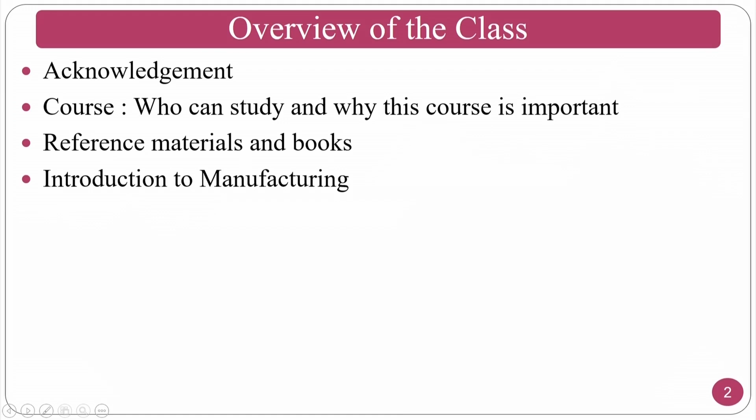Introduction to manufacturing, because abrasive machining and finishing process comes under the category of manufacturing. So just a glimpse of why manufacturing is important, and other things I will explain.

Overview of the syllabus in a normal way, what is the overview, content and all those things, and I am also going to talk about the same things in an elaborative way.

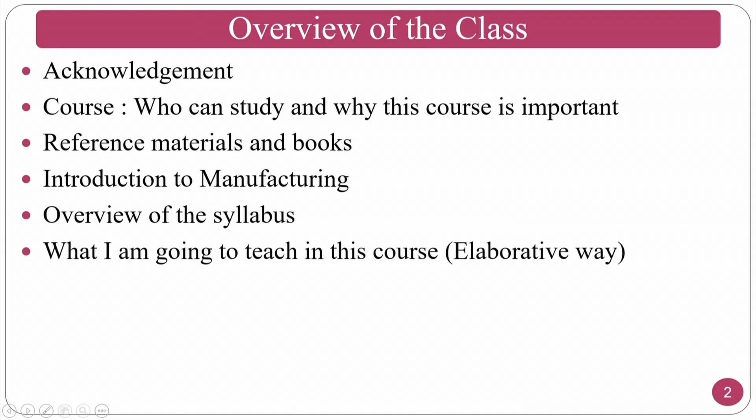So, introduction to abrasive particles. Before you study about this particular course, what is an abrasive particle, how can you measure the size, what are the varieties, what about the cutting edges, what are the rake angles and all those things. The manufacturing of abrasive particles, how these abrasive particles are fabricated, and the size and shape of abrasive particle, how do you determine the size of the abrasive particle. I conclude this particular class with a summary of what I am going to talk about in this particular class.

Coming to the course, an overview of my course on Introduction to Abrasive Machining and Finishing Process. Who can study this course?

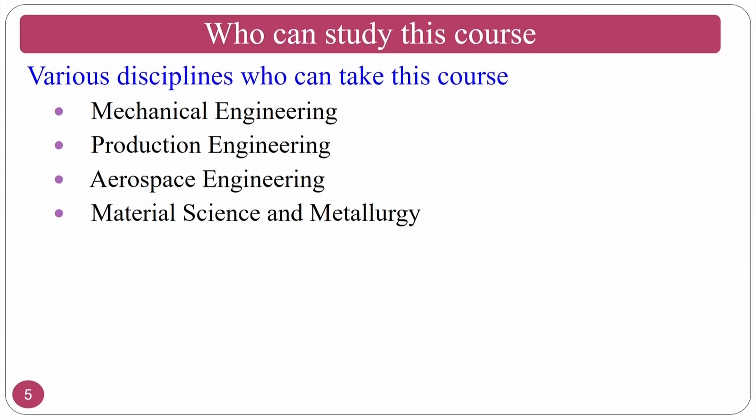Normally this is particularly very helpful for mechanical engineers, production engineering people, aerospace, material science and metallurgy people, and moreover it can also be helpful for other departments who want to learn about manufacturing and other things.

In the intended audience, it can be useful for BTech students where you can learn the basics, MTech and PhD students who can learn the basics as well as take up some of the course contents as research topics, and faculty who teach manufacturing, particularly about machining processes. As you know, this particular course comes under subtractive manufacturing.

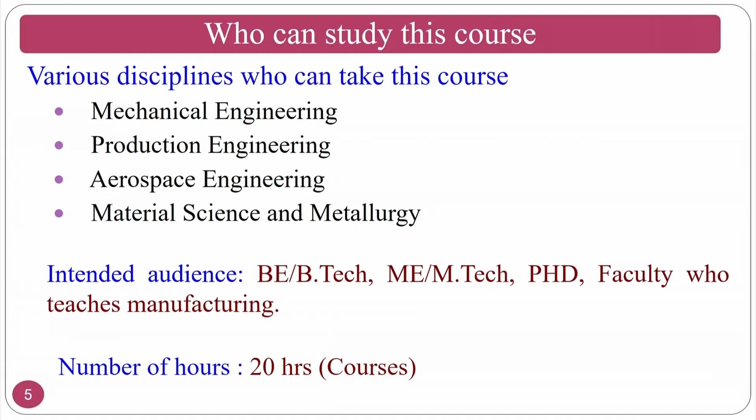Number of hours is 20 hours course. So I am going to take this particular course in 20 hours.

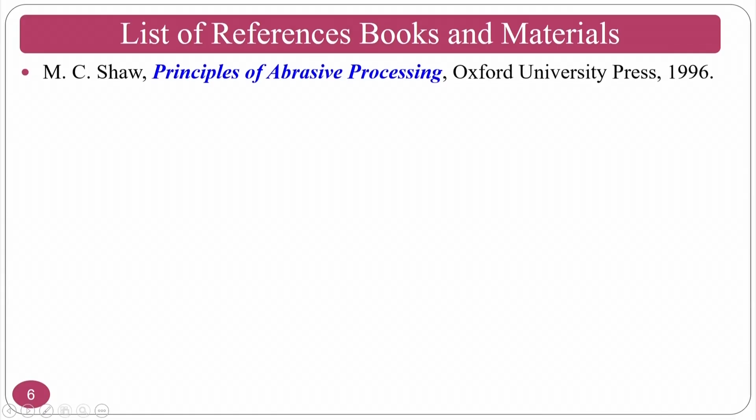List of the reference books. The first and foremost book that you can refer is Principles of Abrasive Processing by M.C. Shaw. Professor V.K. Jain's Micromanufacturing Processes, because advanced abrasive finishing processes you can take from this particular book.

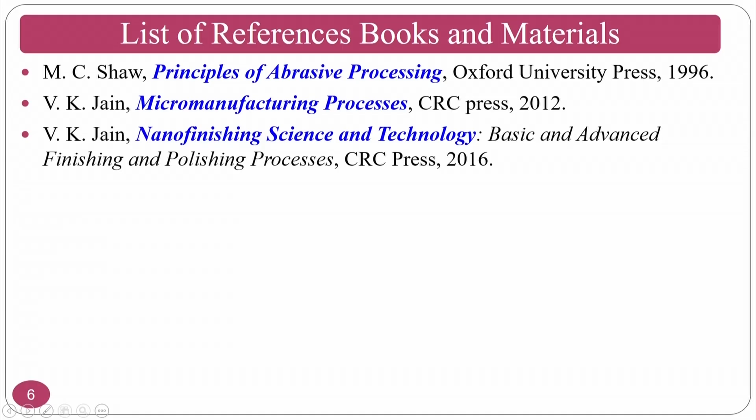And elaboratively, if you want to understand the mechanics, the in-depth knowledge and all those things, you can go for Nano Finishing Science and Technology, where you can study analytically. As this course is an introductory course, you will only understand how this process works, and I will give you a glimpse of the overview. I am not touching the mechanics and other things, so I am not going to teach you any mathematics or something. I will touch some of the mathematics, not in deep mathematics.

In case you want to understand more, you can see this particular book, Nano Finishing Science and Technology by Professor V.K. Jain, and Joseph McGeough's book, where you can study about advanced methods in machining. Professor G.K.

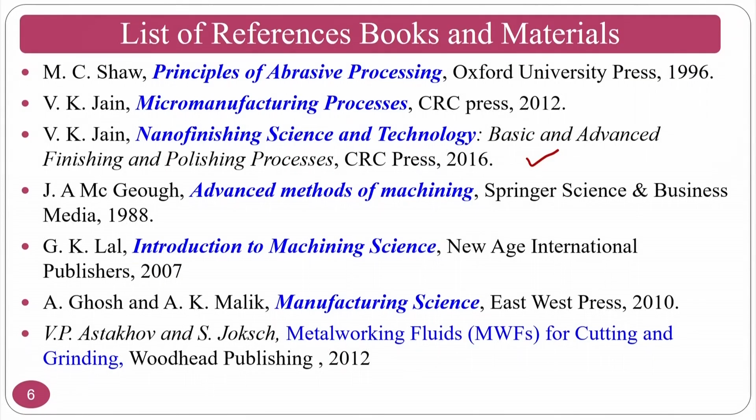I am following the Lal book for grinding operations, conventional machining and finishing operations, and Professor Ghosh and Professor Malik's book on manufacturing science, which gives an overview of abrasive machining and finishing processes, along with Astakhov's work. I also teach about grinding fluids and ecological aspects of grinding fluids, also called cutting fluids, but the same principles hold for single point and multi point cutting tools. Cutting fluids are the same, so we can use these cutting fluids as metalworking fluids in this course.

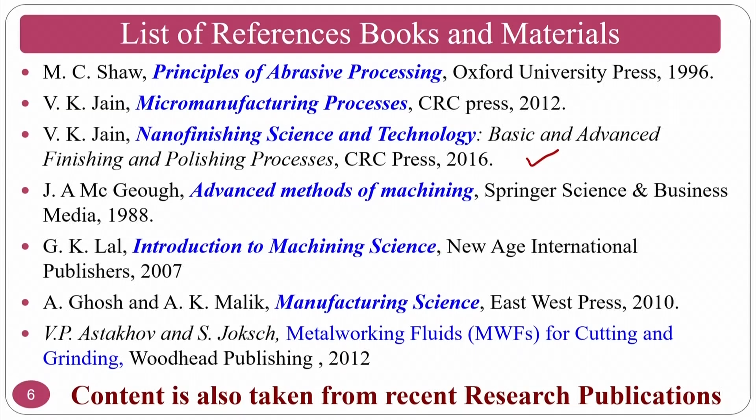The course content is not only from these textbooks; I have also taken some latest research papers and compiled them in this material. So the content is not just from the books, you can also refer to the latest papers in this particular area.

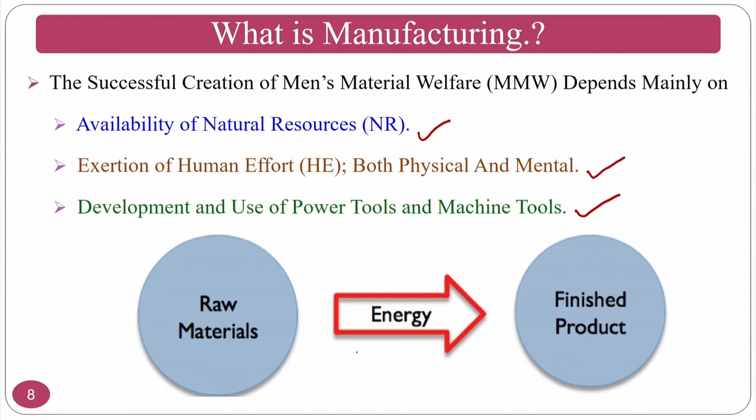Coming to the introduction of this course, which is part of manufacturing, let me talk a little about manufacturing. What is manufacturing? Successful creation of men's material welfare depends mainly on the availability of natural resources, exertion of human efforts both physically and mentally, and the development and use of power tools and machine tools. In a broad view, manufacturing is nothing but conversion of raw materials using certain energy into a finished product. Assume I have bauxite material and want to make an aluminum sheet for a car - I have to use certain external energy to prepare the final product. This process of converting raw materials into a final product is manufacturing.

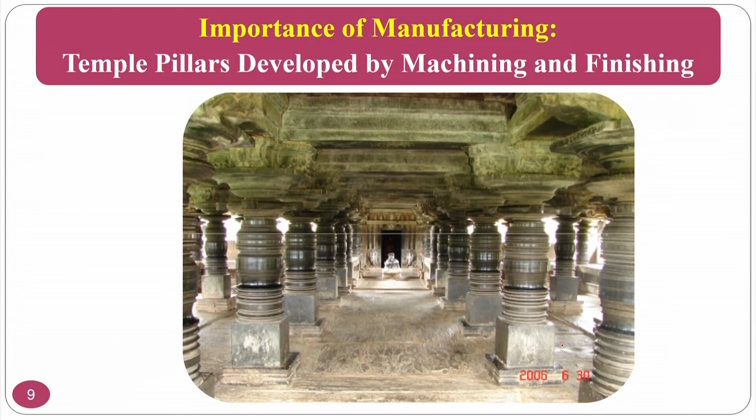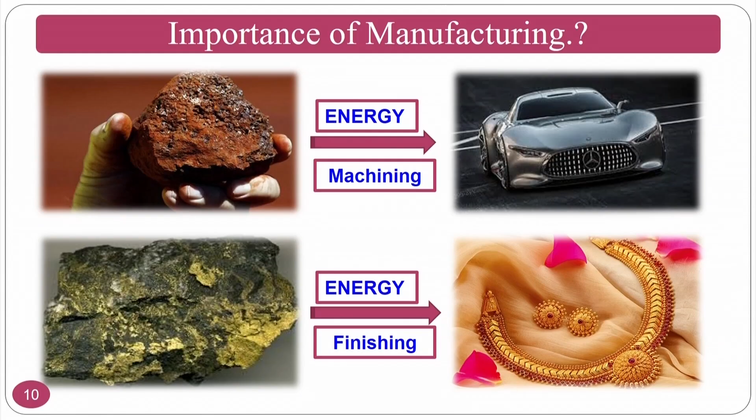This is the importance of manufacturing - if a country's manufacturing is most developed, that country can become one of the superpowers. For example, China's manufacturing is so good, and as Indians we should aim to be equally good compared to China so that we can also become a superpower. So I request everyone to understand that manufacturing is one of the good courses which can make India a great country. Most manufacturing industries are located in India, so gain the knowledge and work for those manufacturing companies to make India great.

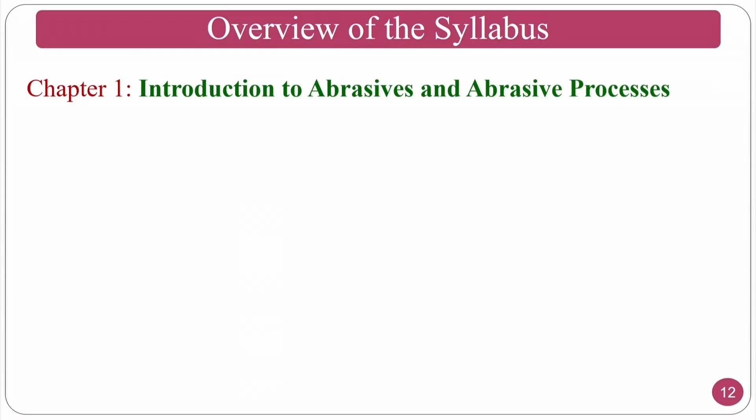Coming to the syllabus of this course on Introduction to Abrasive Machining and Finishing Processes - an overview of the syllabus. Chapter 1 deals with Introduction to Abrasive Particles, classification of abrasive processes, and other topics.

I am dividing this particular chapter into 3 classes - sometimes it may go beyond 3 classes or end in just 2. For this plan, I am having 3 divisions. The first division is Chapter 1A: Introduction to Abrasive Particles and Classification of Abrasive Processes. The second is the grinding process and its classifications, applications, grinding fluids, and other things. The third covers the grinding process, tribological aspects, grinding fluids, and sustainable grinding.

Then we come to conventional abrasive finishing processes like honing, wire brushing, lapping, buffing, super finishing, and other things. We also study surface integrity, which refers to surface metallurgy plus surface morphology, along with many other practical conventional finishing processes in this Chapter 2.

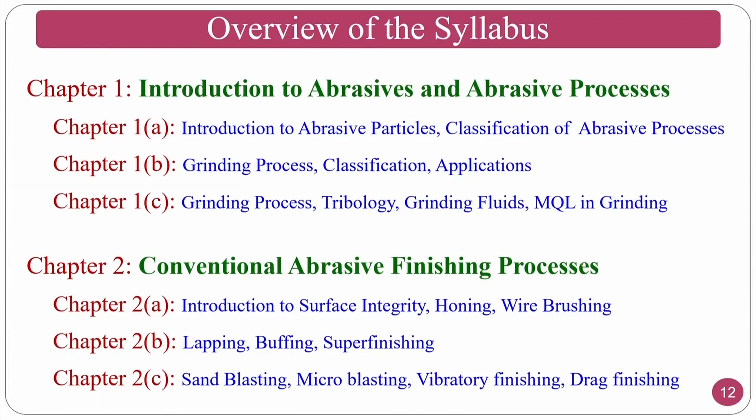In Chapter 3, we study advanced abrasive machining processes. So I am talking about both machining and finishing - sometimes machining, sometimes finishing - and you will understand the difference in later slides.

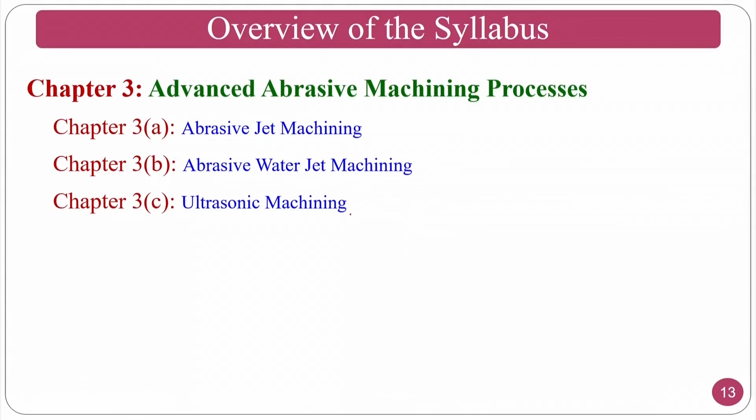In Chapter 3, advanced abrasive machining processes, we study abrasive jet machining, abrasive water jet machining, ultrasonic machining, followed by elastic emission machining.

In Chapter 4, we study hybrid advanced abrasive machining processes such as electric discharge grinding, electric discharge diamond grinding, electrochemical grinding, and chemomechanical polishing - these are the hybrid advanced abrasive machining processes we will study.

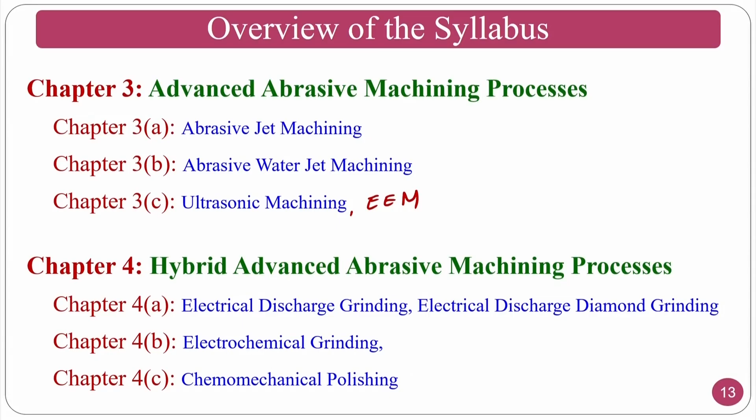Then we go ahead with the latest trends in abrasive finishing processes, such as polymer assisted abrasive finishing processes, where we study abrasive flow finishing process, advances in abrasive flow finishing process, and its applications and allied processes.

Some papers refer to this as the abrasive flow machining process because in olden days people were using it for abrasive flow machining applications like abrasive flow deburring. Nowadays people use it for finishing, which is why it is named the abrasive flow finishing process.

Then we go for magnetic field assisted abrasive machining and finishing processes, called magnetic abrasive finishing, vibration assisted magnetic abrasive finishing, chemomechanical magnetic abrasive finishing, magnetic abrasive deburring, magnetic jet polishing, and other things. Here it is written as machining, but you can correct it to finishing.

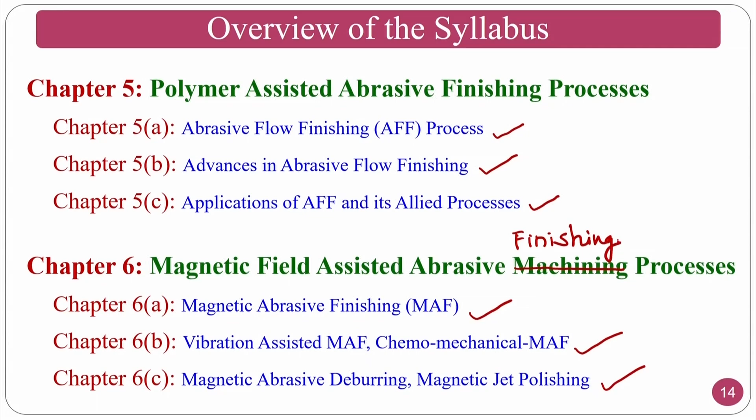In chapter 7, we go for magnetorheological abrasive finishing processes. In the previous case, normally you have particles, but here you will have a magnetic slurry. So you go through the magnetorheological abrasive flow finishing process, magnetorheological finishing process, magnetorheological float polishing, and other magnetorheological or magnetic abrasive finishing processes in chapter 7.

In chapter 8, you will go with hybrid abrasive machining processes or hybrid abrasive finishing processes.

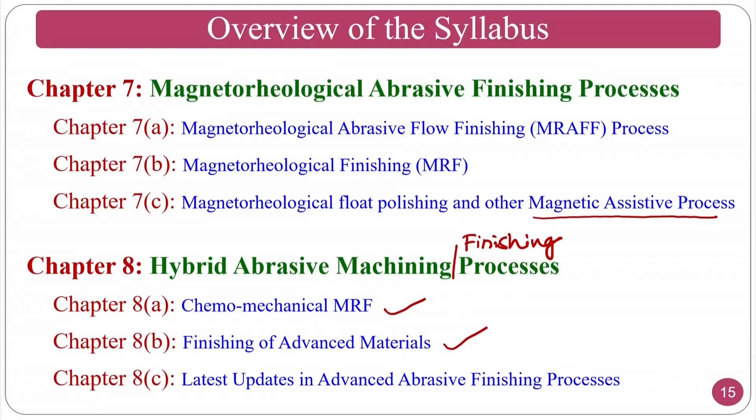This includes chemomechanical magnetorheological finishing process, finishing of advanced materials like biomaterials and implant materials, and the latest updates in abrasive finishing processes from research papers, which I will explain to you.

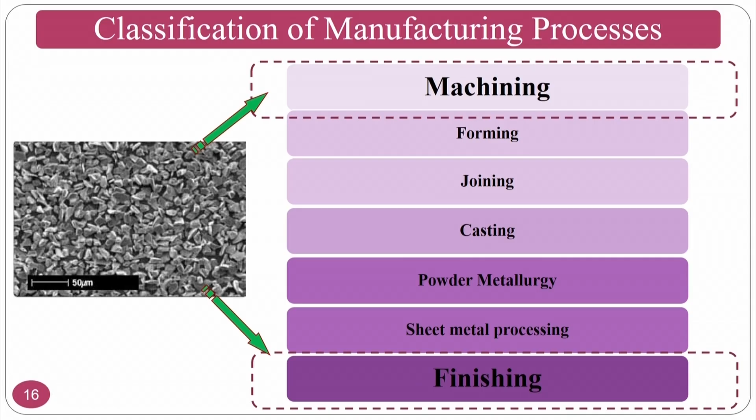Coming to the classification of manufacturing processes, there are machining process, forming process, joining process, casting process, powder metallurgy, sheet metal processing, and finishing processes. Among these, machining and finishing processes are the ones that come under abrasive processes. Normally abrasives are used for machining as well as finishing, which are nothing but subtractive manufacturing processes.

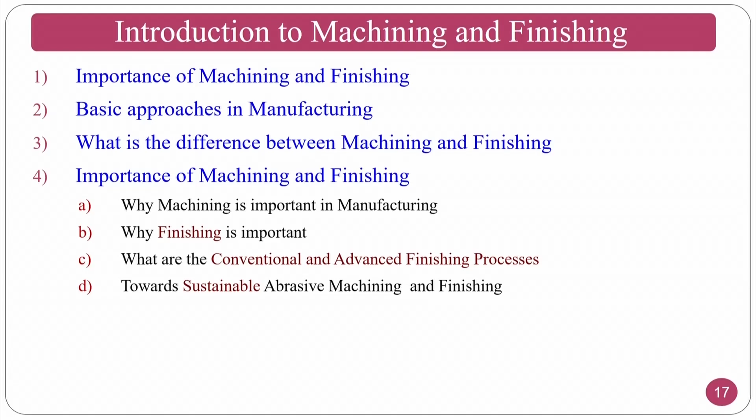In the introduction to machining and finishing, we will study the importance of machining and finishing, basic approaches in manufacturing, and the difference between machining and finishing: why machining is important, why finishing is important, and what the conventional and advanced finishing processes are towards sustainability and all those things.

This point 4 we will come across in later cases, but points 1, 2, 3 we will cover now, and the study of surface integrity, surface morphology, and metallurgy will come in a few classes later.

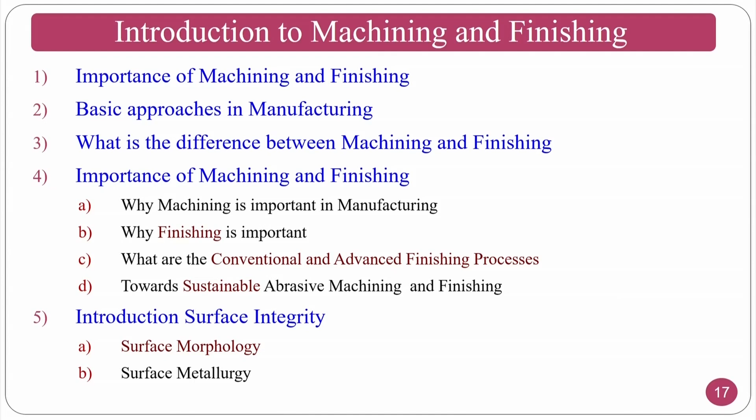First and foremost, why do you have to study this particular course? That is a basic question you will always have. So, this is a before and after example. You can see the surface here.

The welding is done, but you cannot directly use it because the surface morphology is different, and at the same time the surface metallurgy is different. In order to sell your product into the market, you need good aesthetic appeal, perfect tolerances, and other things. For that purpose, you should go for machining and finishing, and you can clearly see here how the things are achieved.

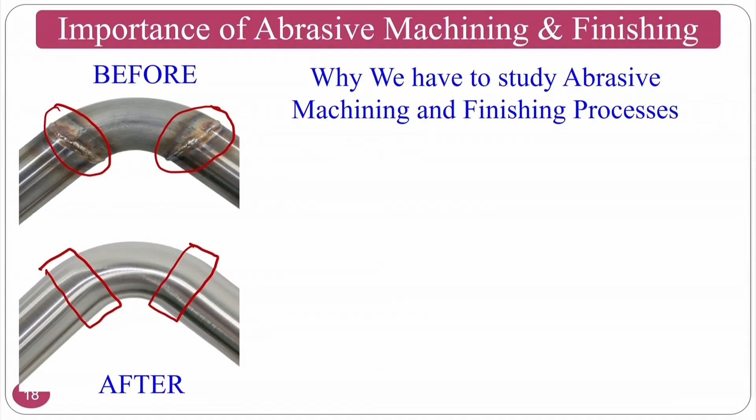Assume that you are going to keep the casted product directly inside the knee. What will happen? The surface roughness is very high, metallurgical aspects are different, so there will be a corrosion effect and friction. Lots of problems will come. To overcome that, you need to go for abrasive based machining and finishing processes.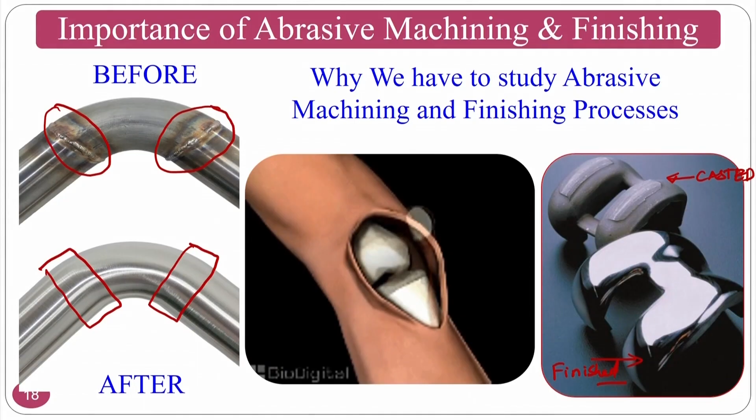In case 1, the pipe welding and machining example, you can go for abrasive based grinding processes, but you cannot do that for a knee implant. So you have to go for abrasive finishing processes. In case 1, you need abrasive machining processes; in case 2, you need advanced abrasive finishing processes.

What are the two approaches in manufacturing? Normally there is a top-down approach. Top-down approach means I have a material, and I have to do the machining and take out the useful product, that is the object I want. This is called the top-down approach.

I have a big shape, out of which I want to make a small component. Then I am doing a machining process to make a component, that is called the top-down approach. I am coming from top to bottom.

In the bottom-up approach, normally I have powders and I am making a component. Powder metallurgy is a bottom-up approach: I have powders, I compact it, sinter it, and I make a component. In the first case, I do the machining operation.

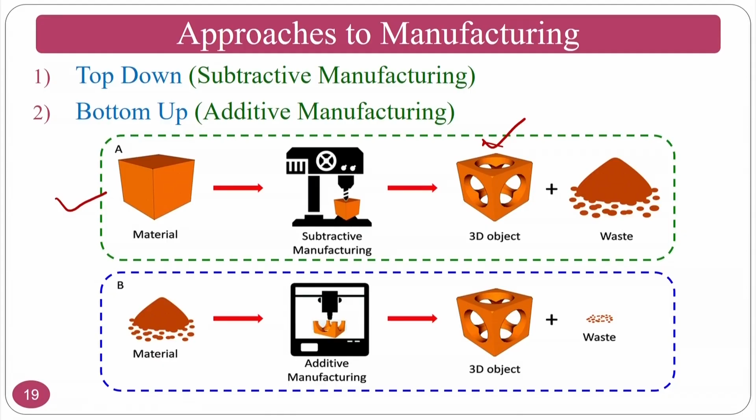There is some problem in the top-down approach, such as material waste in terms of chips and other things, and this particular course follows the top-down approach. Mostly people sitting here, maybe BTech students or starting MTech students, you may not know the difference between machining and finishing. Many of you may know, but you should understand machining and finishing.

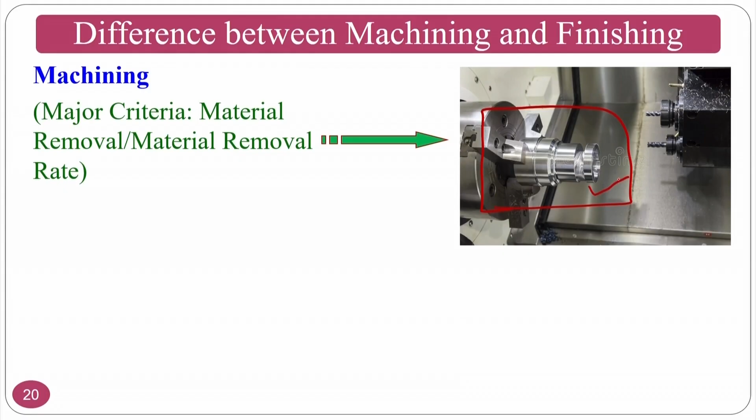This course is about abrasive machining as well as finishing, so abrasives are constant, and you use them for machining applications as well as finishing applications. In a machining process, how much material I am removing from the component is important. That is my major criteria.

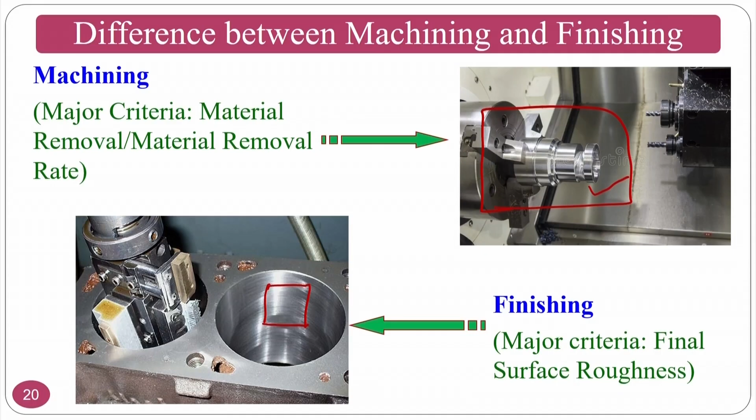In a finishing process, my major criteria is not about how much material I am removing, but whether I got the required surface finish or not. That is what matters most. Even though I remove less material, if I achieve good surface finish, meaning the surface roughness is very low, that means it is my finishing process. So you think about what surface roughness you want, so that you can sell this particular product in the market. If that is the criteria, you go for the finishing process. If your criteria is machining, you go for the material removal criteria.

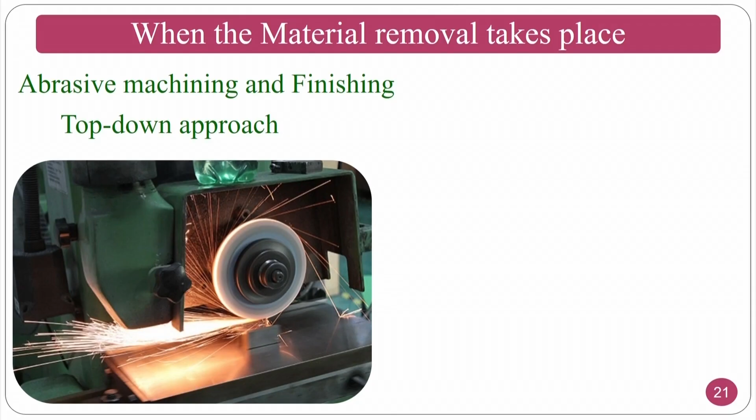Assume that in 10 minutes I want to remove 10 mm thickness, so you have to go for a machining process. When material removal takes place, normally in the abrasive machining process, which is a top-down approach, such as grinding or lathe processes and others, the machining takes place after the fracture point. That is why these machining processes are called severe plastic deformation processes.

Once past this point, the material starts shearing from the workpiece. We do not bother much about the elastic limit and other things, we directly go for failure. In this slide it is shown as fracture, but for machining and finishing, you need to remove the chip, meaning you have to delaminate or dislodge that particular chip from the surface, meaning you are fracturing or shearing it.

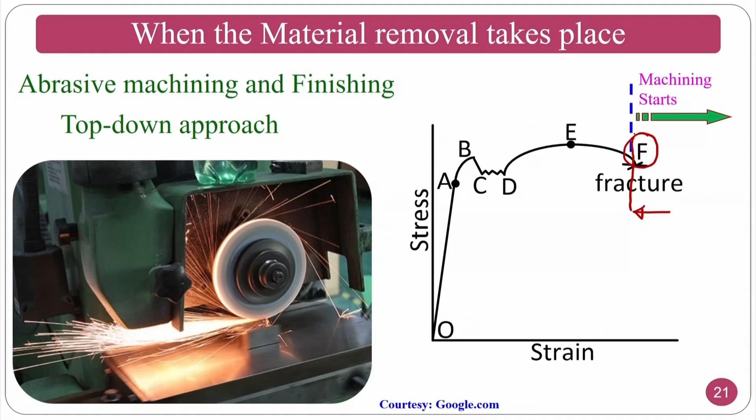This particular thing will start after this point F. So do not think in a negative way that we are fracturing the particular component. It is not fracturing, we are taking out the chip from the workpiece.

What I am going to teach in this course, introduction to abrasive machining and finishing processes, you have seen the summary, but I will explain in an elaborative way how I am going to teach this course. This will help you decide whether you really like the course, whether it will help you in your future, or whether you are going to gain knowledge from it.

In course 1, I have already taught you what you are going to study: introduction to abrasive particles, bonded, unbonded, super abrasives. You will study when you call it a super abrasive, when you call it a bonded abrasive, when you call it an unbonded abrasive, and other things.

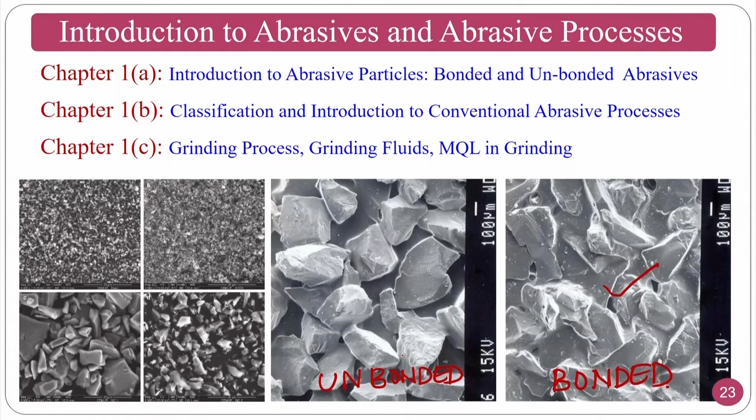So chapter 1 also deals with the grinding process. We study about grinding wheel specification, classification of grinding processes, and what is surface integrity, meaning how it divides into two things: surface metallurgy and surface morphology.

Grinding fluids are an important topic, especially when you go as an engineer to a company where people use cutting fluids or grinding fluids. How this cutting fluid falls in the machining or grinding region, how it emits emissions, and how it affects the operator and surrounding environment. By studying grinding fluid emissions and their consequences, you learn how to resolve this problem. So, sustainable grinding, and you also study about micro grinding process, when you call it micro grinding, when you call it macro grinding, and applications of various grinding processes.

This is called a surface grinder, and you can see in this particular picture how the material is removed from the surface grinding process.

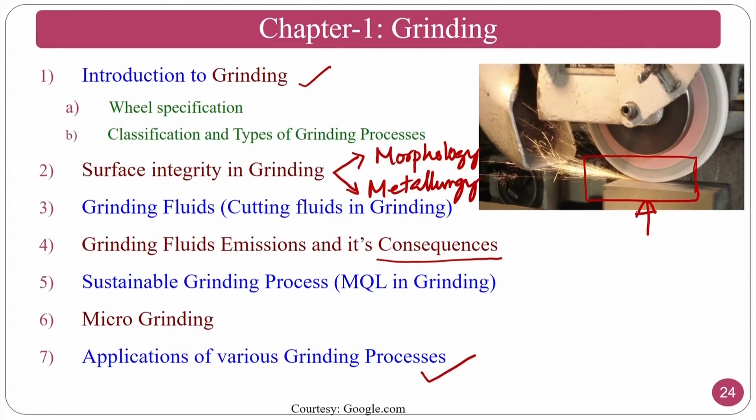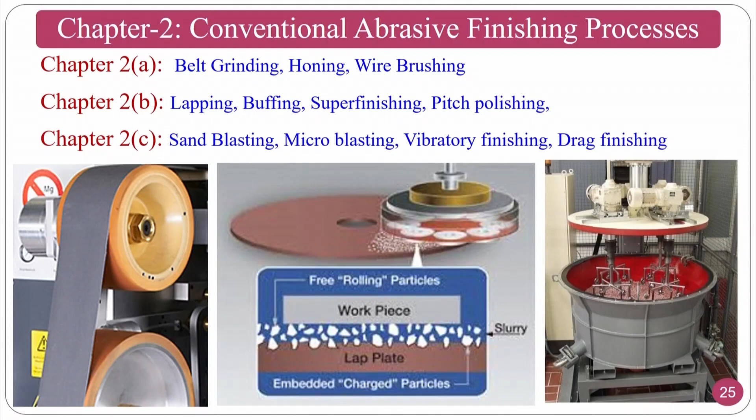The conventional abrasive finishing processes include belt grinding, honing, wire brushing, and lapping. Normally lapping follows 3-body abrasion, while grinding follows 2-body abrasion, and these are studied under the tribological aspects of grinding. You will also study latest topics like pitch polishing, sand blasting, micro blasting, vibratory finishing, and drag finishing. These are the common conventional finishing processes used in mass production or batch production.

Coming to advanced abrasive machining processes, you will study abrasive jet machining, where abrasives get assistance from compressed air, since air is the carrier medium and abrasive particles follow the path of the injected air. But air has a drawback: it can diverge easily, which may disrupt the dimension you want to achieve.

For that purpose, people developed an advanced version called abrasive water jet machining, where a highly compressed or pressurized water jet mixed with abrasive particles is used. Compared to abrasive jet machining, this gives a better, narrower, and more precise structure, since the divergence here is slightly less.

You will also study ultrasonic machining, where a piezoelectric transducer gives ultrasonic vibrations, and an abrasive slurry passed from the slurry nozzle contains abrasive particles. This tool reciprocates and generates whatever shape is required, a converse shape of the tool.

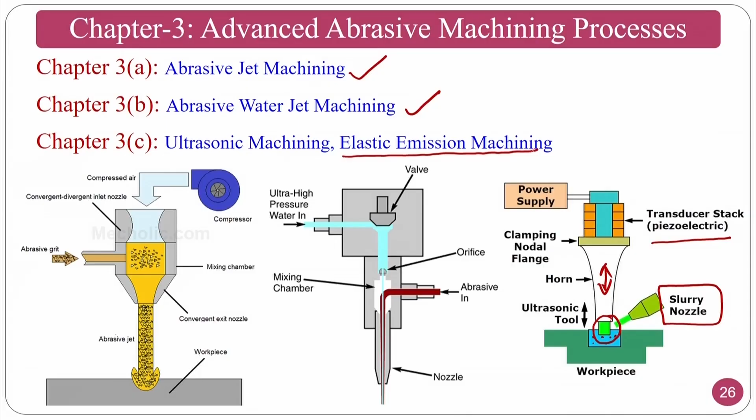We will also study elastic emission machining, one of the latest trends in machining, which can also be called a finishing operation because it removes material in a very minute amount.

In chapter 4 we study advanced abrasive machining processes which are hybrid. Hybrid means clubbing one conventional machining process, like grinding, with an advanced machining process like EDM, electrical discharge machining. One common example is electric discharge grinding, where electric discharge machining and grinding are clubbed together.

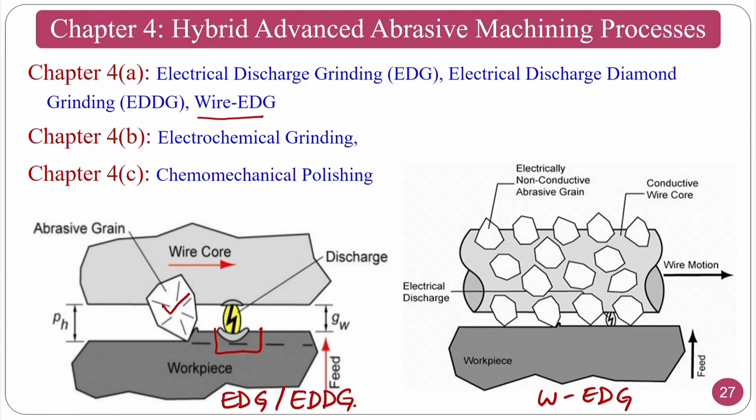Another process is electrochemical grinding, a similar technology where electrochemical machining is clubbed with grinding, and chemomechanical polishing, which some papers also call chemomechanical planarization. What you see here is wire EDG, and this is EDDG, electric discharge diamond grinding. If the abrasive particle is silicon carbide or alumina, it is called EDG; if it is diamond, it is called electric discharge diamond grinding.

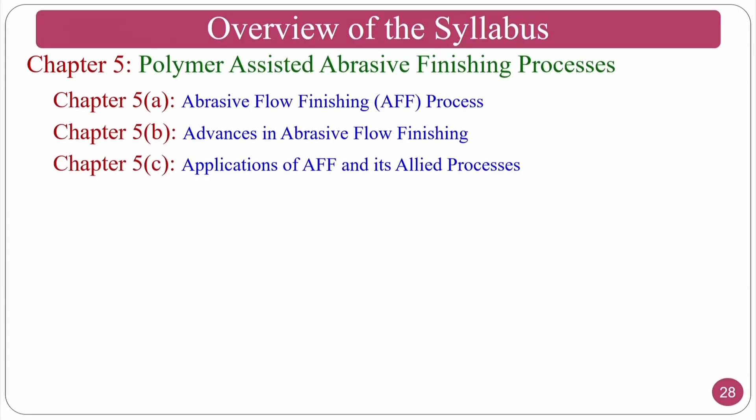Then comes chapter 5, where you study polymer assisted abrasive finishing process, a good process for complex surface finishing. There are three varieties: one-way abrasive process, two-way abrasive process, and orbital.

In one-way process, the medium is most important. In this chapter you study the machining, the machine structure, medium, tooling, and other things. In one-way, you are just pushing the medium, which is polymer plus abrasives plus rheological additives, in one direction toward the component for finishing, and it comes back.

In two-way, the component is here, and you are reciprocating from two directions. Whenever it moves upward in this direction, the other side also goes up, and whenever it goes down, the other side also goes down. This is called two-way.

And orbital, you have an orbital motion, where if I want to finish complex blind holes and other features, you can do it by orbital finishing, but here also the medium is reciprocated.

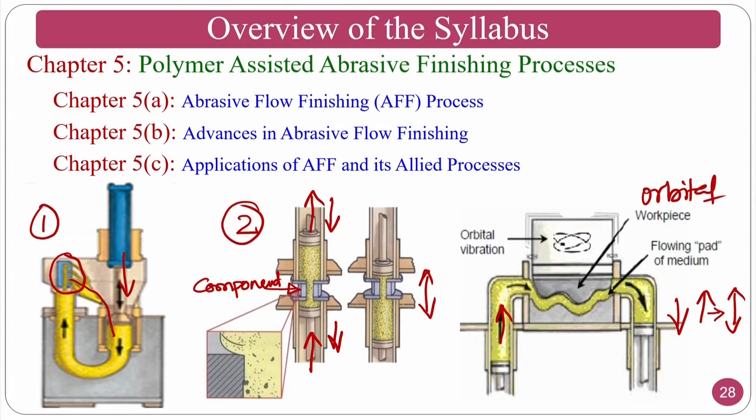So medium will come and again this piston will move up. Normally, if you average these motions, you get this particular motion. Similarly, in the two-way also you will have this particular motion. It goes up and comes down, goes up and comes down in a two-way. Similarly, in the orbital also.

Magnetic field is another field of interest to many masters and PhD students, along with polymer rheology. You can also study about magnetorheological fluids. Here, magnetic abrasive finishing, vibration assisted MAF, chemomechanical magnetic abrasive finishing, magnetic abrasive deburring, and magnetic jet polishing, among other things, you will study in this particular course.

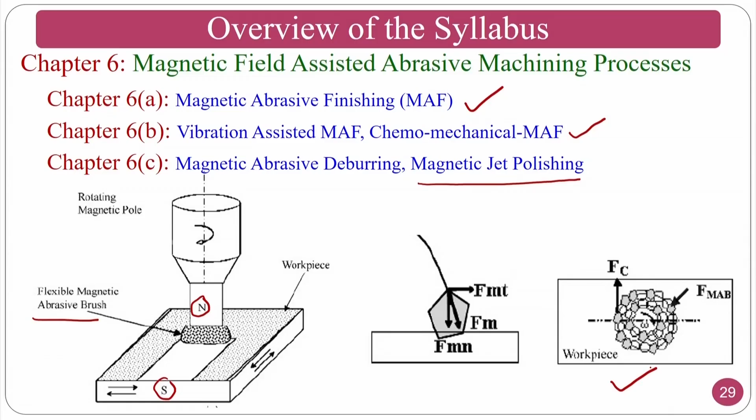You can see here, this is the north pole and this is the south pole. In between, you form a magnetic brush, where the magnetic brush consists of carbonyl iron particles, which are basically iron particles in pure form, along with abrasive particles. Whenever you have an electromagnetic field, these particles will form a chain. CIP particles, that is carbonyl iron particles, will form a chain, wherein abrasive particles are held. At the same time, some people will also use bonded abrasives, where they sinter the abrasive particles onto iron particles. That is what you can see in these particular things. These are all one type of bonded abrasive particles.

In this chapter 7, you will study about magnetorheological fluids, where it is basically a slurry. These fluids are used for sophisticated applications like contact lens polishing and other things. So, magnetorheological abrasive flow finishing process, magnetorheological finishing process, magnetorheological float polishing, and other magnetic assisted processes we will see. Whatever you are seeing here is MRF, that is called magnetorheological finishing process.

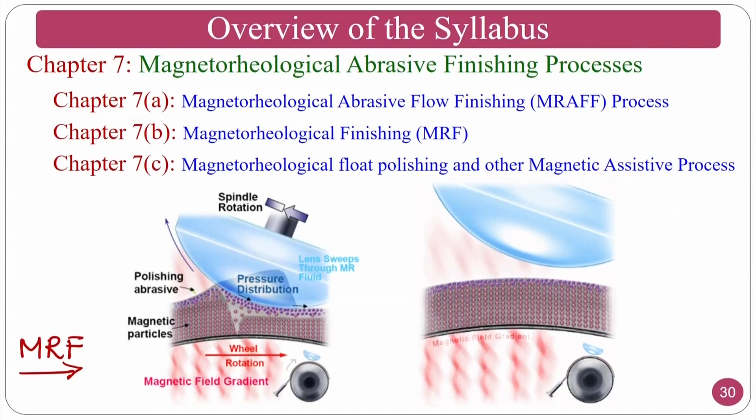You can also see the video of how the magnetorheological finishing process works. Whenever magnetic fluid is put onto the disc where the electromagnetic field is there, it forms a chain, and then you can put the component, the workpiece, and press it against the fluid. Since it is a fluid, whenever it comes near the electromagnetic field, it forms a stiff fluid and the polishing takes place. The stiffness is a function of your composition and the field strength, that is, the magnetic field strength.

At last, in the last chapter, we will study about hybrid abrasive machining processes and finishing processes. One is chemomechanical MRF, where we study how the chemical aspects of this process come into picture, along with the magnetorheological finishing process, for finishing of advanced materials like biomaterials, electronic materials, aerospace materials, wherever required. Normally, the complex surfaces of knee implants, which are biomaterials, have to be finished, and components like those used in fighter jets and other aerospace and defense applications, and silicon based electronic things also.

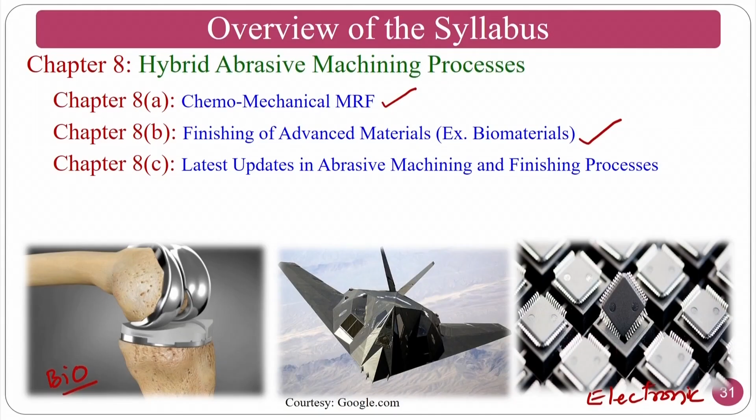Components also we will see how to finish, and latest updates if time permits, and what are the latest updates in this particular abrasive machining as well as finishing, and we will summarize this particular course. So this is the complete elaborative way how I am going to teach, or how the lectures are planned. Sometimes it may go plus or minus on some things, because this is the exact plan I am structuring for this course, and it may slightly vary. In some cases it may go for 4 lectures, in some cases it may go for 2 lectures. Mostly I will try my best to give you better knowledge in a systematic way.

Now I am moving to the introduction to abrasive particles, because this particular course deals completely with abrasive particles. So you should know what an abrasive particle is, how you can measure the size, shape and other things. So, various abrasive particles are commonly available across the globe and particularly in India. You can go for alumina, silicon carbide, boron carbide, cubic boron nitride particles, and diamond particles.

The hardest particles are diamond particles. Most abrasive particles are ceramics, meaning that they are brittle in nature. If you just press it with a mechanical force, it will fracture. Assume that it is like glass; if some external force is applied, it will fracture into pieces. So that is called a ceramic particle, and these particles are brittle in nature.

These advanced abrasive finishing processes, if you require finishing at a nano level, normally you will go for high hardness abrasive particles such as diamond particles and other particles. These particles are called super abrasive particles.

Most of the abrasive particles are stable materials. Normally Al2O3 or SiC, these are all stable. They don't have free electrons in the outer shells in most cases. So these are more stable.

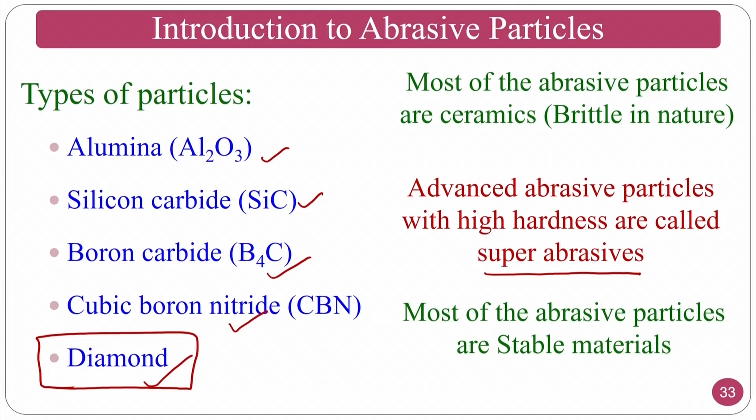Chemically reacting is very less compared to metals. So normally two abrasive particles are used in most machining and finishing applications: alumina, or aluminum oxide, and silicon carbide. Aluminum oxide or alumina is an inorganic compound with chemical formula Al2O3.

This is called SiC, silicon carbide. The molar mass of alumina is 101.96 grams per mole, and silicon carbide's molar mass is 40.1 grams per mole. Aluminum oxide is also called alumina, and silicon carbide is also called carborundum.

Alumina is an electrical insulator, and silicon carbide is a semiconductor. Normally it has very less conductivity. That is why many people try electric discharge machining of silicon carbide and other such materials.

Alumina is a white crystalline powder. Silicon carbide shows yellow to green crystals. The melting point and boiling point of alumina are 2072 and 2977 degrees respectively. The melting point of silicon carbide is 2830 centigrade. It doesn't have a boiling point; it directly sublimates.

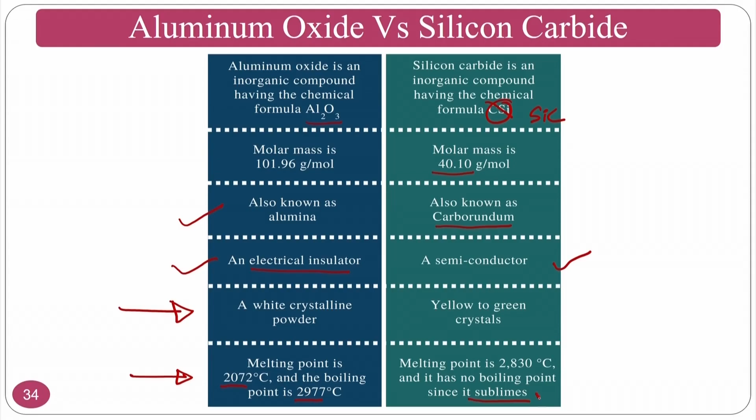It will rotate at high speed. These balls are much harder balls, so they will hit the particles. Since these are ceramic particles, brittle fracture will take place, and in a run of 5 to 8 hours, sometimes people go for milling for 24 hours also, you can get fine powders.

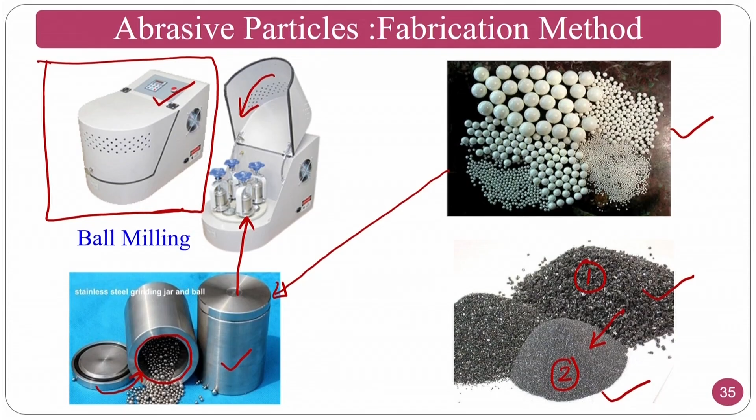Similarly, if I want big particles made smaller, you can go for commercially used mass production methods. Assume I want to make smaller particles; you can see the balls are there and you place the abrasive particles whatever you require, then you will get the particles.

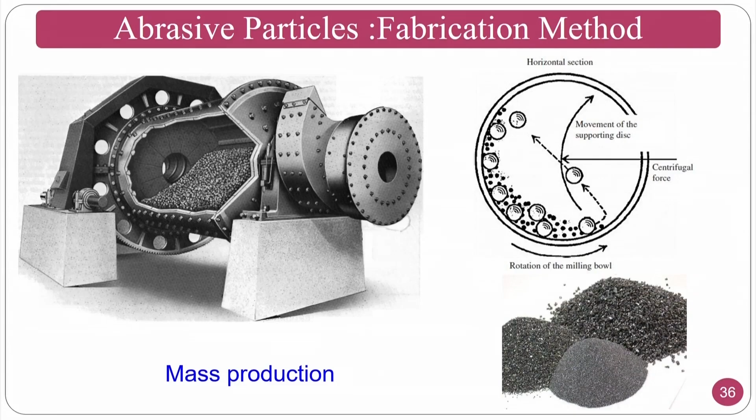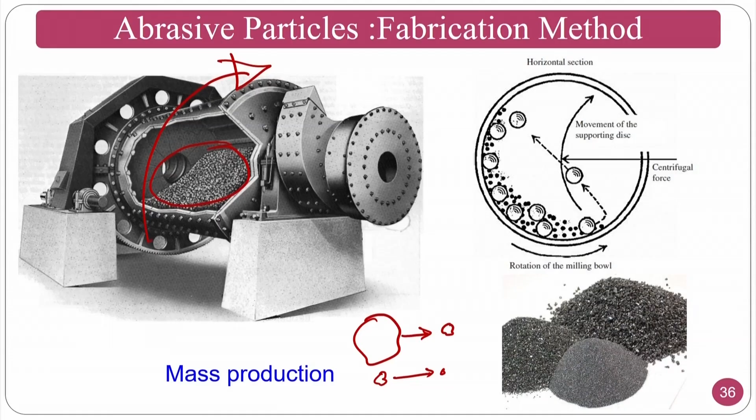Similarly, you can convert big particles like these to these, or these to these. You can do it particularly with this method. You have to place them inside this chamber, close it, and rotate at very high speed. Sometimes people also give vibrations to it, so that you get much better, uniform sized particles.

What is the difference between bonded abrasives and unbonded abrasives? If you see here, the abrasive particles are individual entities - this is called unbonded abrasives. As I said in the earlier slides, these are called bonded abrasives, where the periphery of the abrasive particles is completely bonded with a bonding material.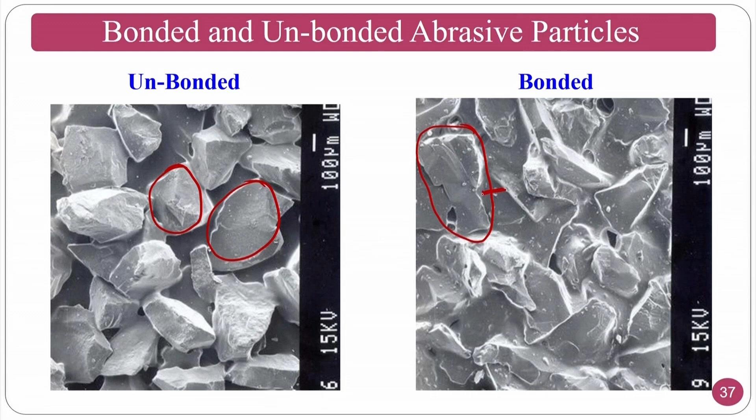Regarding shape and size, the size normally ranges from coarse to fine to super fine. Abrasive particles are divided into 4 segments: coarse, medium, fine, super fine. These are the coarse particles, and as it comes to bigger sizes, it will have bigger size particles also. Note what scale is being used here, because the particles look approximately the same, but the scale is different, so you should be very careful about scanning electron microscopy scales.

So how do you calculate abrasive particle size? Normally, whenever a person wants to purchase a particular size, you always mention the mesh size.

Mesh size means number of sieves. Normally our mothers sieve wheat flour and other things using a sieve like this. This is called a sieve, and mesh size is normally represented in these terms.

Assume you are going to measure a mesh size of order 1000. How do you calculate the particle size equivalent? It is 15.2 mm divided by the mesh number.

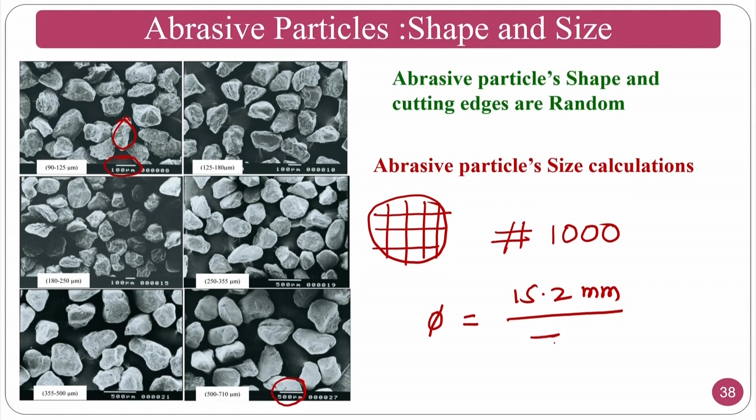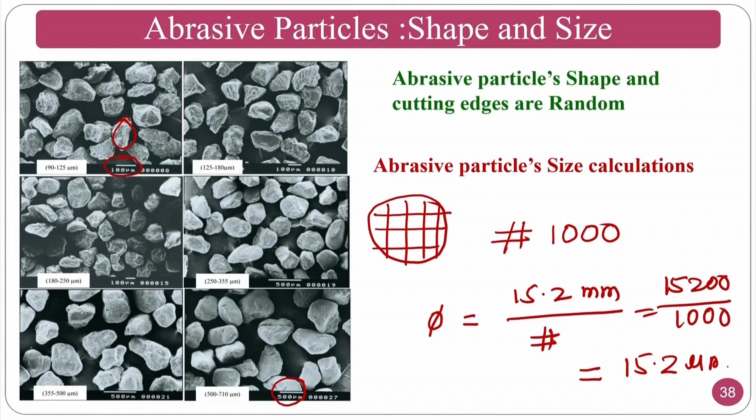If you convert into microns, it becomes 15,200 divided by 1000, which comes to approximately, or exactly, 15.2 micrometers. This is the particle size or average diameter of this particular abrasive particle, and this is how you calculate the size of an abrasive particle.

Once you know the abrasive particle size, you have tables showing when to call it a coarse particle, a fine particle, or a super fine particle. If the particle size is very small, you call it a super fine particle.

There are varieties of abrasive particles, and some applications require coated abrasive particles. People also use coated abrasive particles. Normally you can see the abrasive additive coating, size coating, abrasive grain particle, base coating, and backing material.

Whenever you want to make super abrasive particles, you can coat very hard materials on abrasive particles. Sometimes people want soft coatings as well. Depending on whether you want soft or hard coating, you can coat these particles accordingly. Some people also use functionalizers.

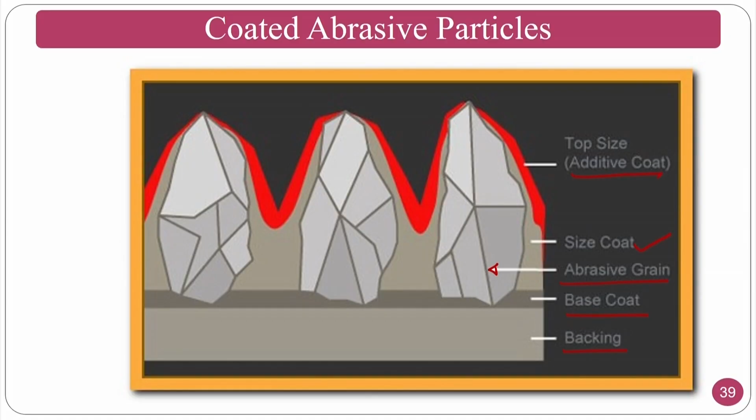Whenever talking about magnetorheological finishing or polymer rheological abrasive finishing processes, these abrasive finishing processes require perfect bonding between the rheological additives and the abrasive particles. That bonding strength can be varied using functionalizers.

You can coat the particles, or in a ball milling operation, you can put the functionalizer and mix it, or use ultrasonication, or many other techniques to functionalize or coat them. These are called coated abrasive particles.

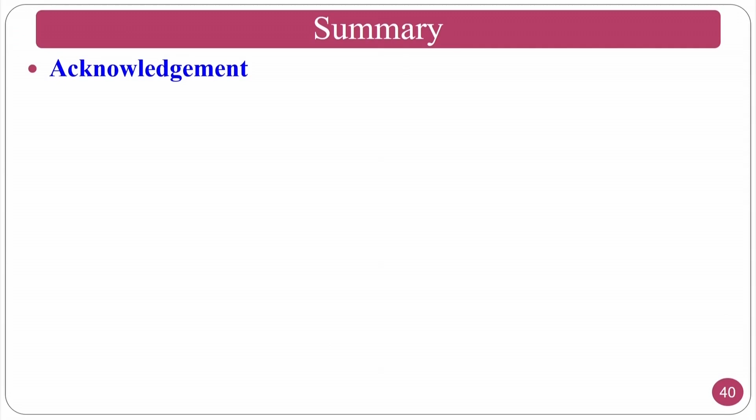As a summary of this course, I acknowledge many people, from the CET head Professor Kejwania to Professor Narayan Reddy, who helped me technically. Professor Kejwania helped by providing facilities and staff. I am thankful to him.

And Professor Narayan Reddy, who was a very good friend of mine, and he is no more. He gave me a lot of knowledge from the technical point of view. I am always thankful to Professor Narayan Reddy.

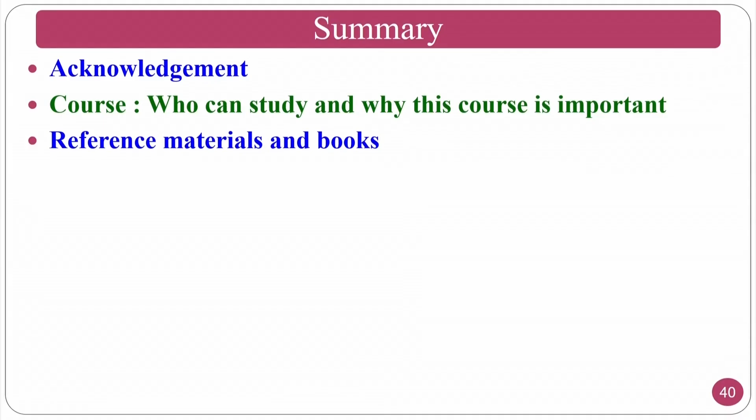I have already explained the course, who should study it, why you have to study it, and to whom it will be helpful. Regarding reference materials, this course does not only depend on books or reference materials, I am also following some of the latest research papers.

If you can understand clearly, you can easily answer the assignments as well as the examinations. To understand the questions and assignments, please understand the course and strictly follow it so that you can easily gain knowledge as well as marks.

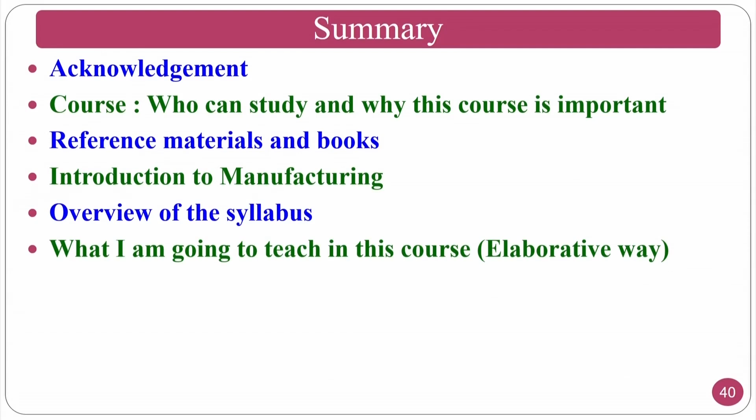This was an introduction to manufacturing, an overview of the syllabus in a nutshell as well as in an elaborative way, covering what I am going to teach, introduction to abrasive particles, manufacturing of abrasive particles, and how abrasive particles are fabricated. These are the materials used in grinding, lapping, super finishing, abrasive flow finishing, and magnetorheological finishing. The abrasive particle is the main element of this course.

I explained about abrasive particles, their size and shape. The size is random, and the shape is also random, with cutting edges randomly oriented. One abrasive particle may look like this, another like this, another like this, so the shape is random, and the cutting edges on each particle are also random.

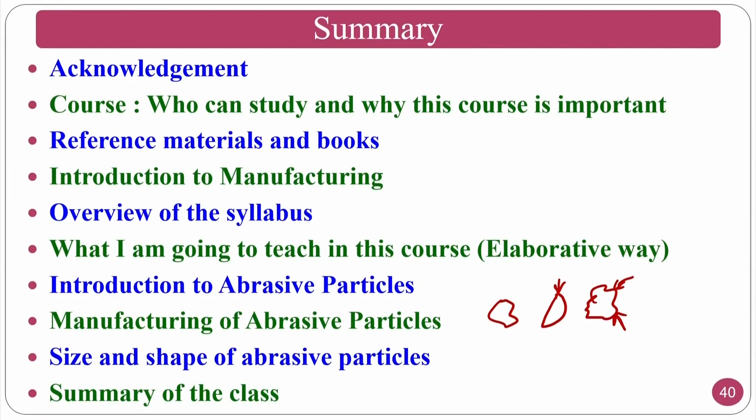If randomness increases, the surface roughness becomes better and better, meaning the surface roughness value will be lower and lower. And with that, I am summarizing this class. Thank you for your kind attention in this class, and in an elaborative way about this course and content, we will come up and hope you gain great knowledge from this course. Thank you.